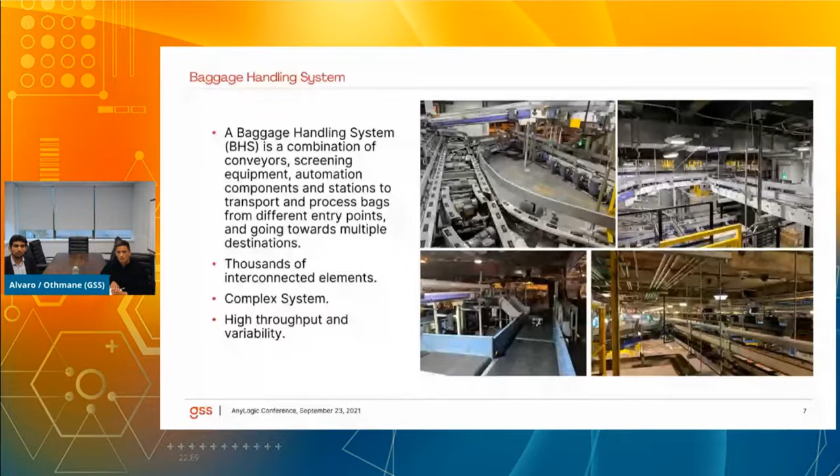Like I said in the previous slide, we modeled a BHS with more than 1,000 conveyors and with more than 100 decision points, resulting in more than 2.8 million decisions daily. So the process starts at the airline counters where the bags are dropped in a conveyor network. The bags are loaded into empty trays through a tray conveyor.

The loaded trays go through the explosive detection system, and then the bags are dropped into a conveyor network, and the empty trays are stored in a temporary parking area. The bags that are dropped here join piers and carousels, then are transported to the airlines through unit load devices.

There are three main types of decisions that a tray should take. The first one is start and stop decisions. For example, the empty tray should stop at the end of the parking area waiting for the bag, and also the bags should wait at the end of the conveyor waiting for the empty tray.

The second type of decision is point of divergence. So for example, a tray should take this segment or the other segment. Here we can see that the first bag went through the first CT machine, and the second bag went through the second CT machine.

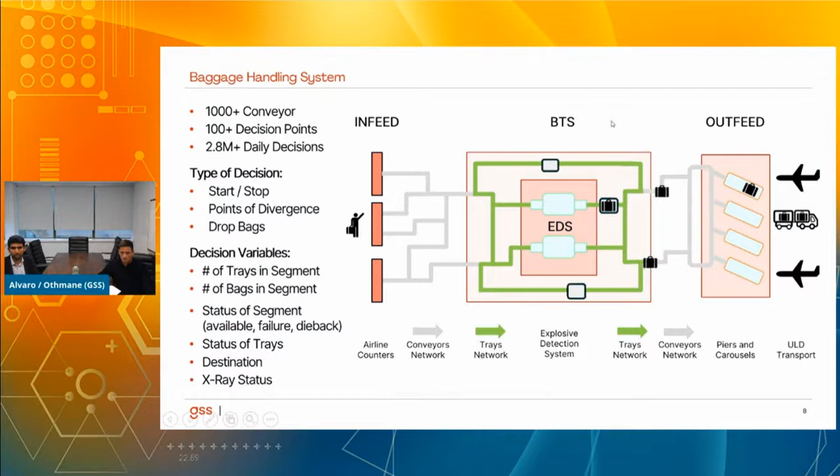Given space constraints between trays, the implementation of the bag tray system was successful from a mechanical point of view, but the flow management system presented many improvement opportunities. The main business challenges we face are that flights are delayed, so the peak time may change in the day, so the resource allocation

should be adapted. Another main business challenge is that the customer experience is affected at counters and at the transit drop-off belts if we can no longer push bags into the system. And the other one is that the practical capacity, mainly related to the screening and handling equipment, is not used at its full potential.

So there is a need for a robust and dynamic system architecture to support the implementation of a smart control automation approach. That's why we introduced a high-level control approach. And to test operational improvements and infrastructure evolution, we integrated the digital twin with the high-level control.

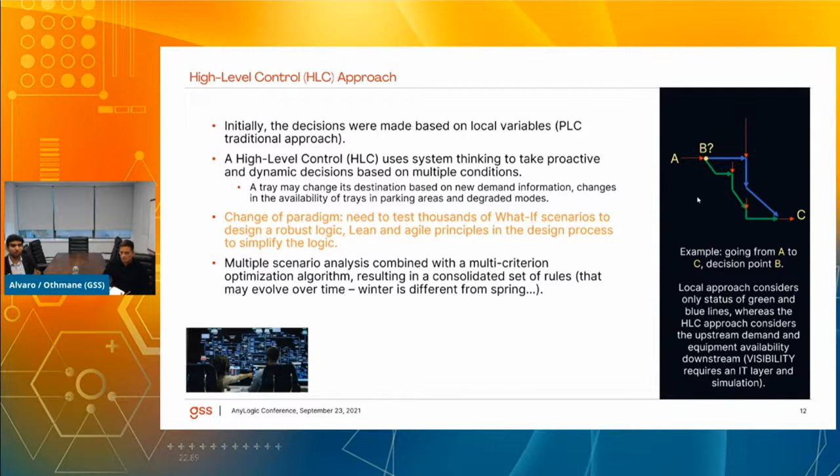For example, here we have an example of a high-level control rule. So we want to take a decision at the point P1 that corresponds to the conveyor T29-115A. So we need to choose between continuing to sector 1 or diverting to go to sector number 2. So from a human read, the logic is, for example, here.

So if we have the buffer 1 and buffer 2 below 5, so the buffer 1 is the number of trays that are accumulated in this line, and buffer 2 the number of trays that are accumulated in this line, it's below 5, then we choose to go through the sector number 1. The other condition, if we have the utilization of a component that is downstream the sector number 1, so if it's below 50%, then we go through the sector number 1.

And the third condition, if we have a ratio between buffer 1 and buffer 3 below 50%, then we'll have to go through the sector 1. Otherwise, we have to choose to go to the sector number 2. This rule is then transformed into a system rule. So in our simulator, we have the ID of the components, the condition, and the expressions that we use within the condition.

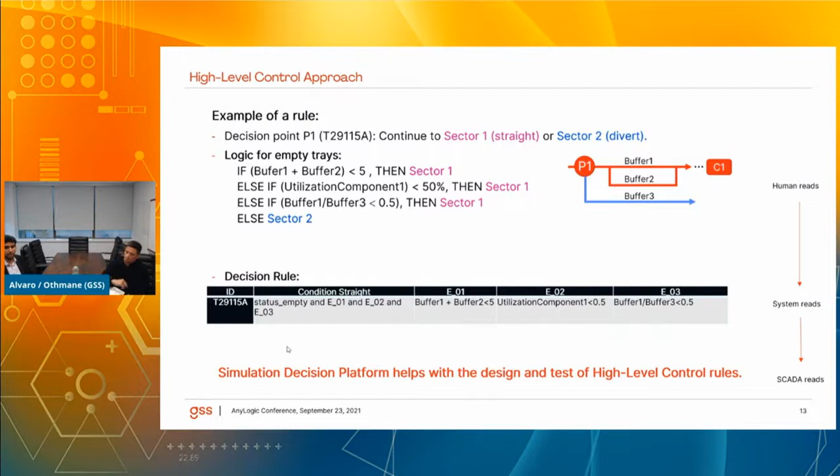Thanks, Othmane. So, as you can see, this is a very complex challenge that requires a high-level approach as well as a systemic view. We like this quote, or we bring it a lot into our projects, from Herbert Simon, which says that modeling is a principal and perhaps the primary tool for studying the behavior of large and complex systems. We know that this is a very complex system, and we know that modeling and simulation is a key and fundamental tool to explore the solution, the HLC concept in this case.

So how does our simulation model look like? First, why do we choose AnyLogic? First, we knew it was a complex system that requires a dynamic architecture and a very flexible software. And we also knew that there were, as Othmane said, millions of decisions that have to be taken during a runtime simulation. So those simulations need to be managed by an agent-based approach. So combining a flexible, robust system and an agent-based approach, we knew that AnyLogic was the proper choice for us.

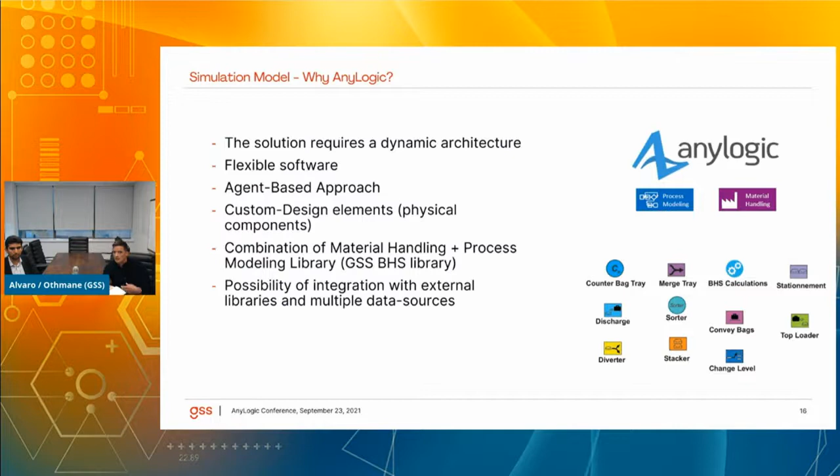But I will say that part of the most important elements are the BHS calculations. We take the human reads that Othmane described previously and convert that into vectors of Boolean variables, so it can be used and transformed into decisions during the simulation. Of course, the integration with external data sources such as TXT files, CSV, Excel, and databases was a very important element as well.

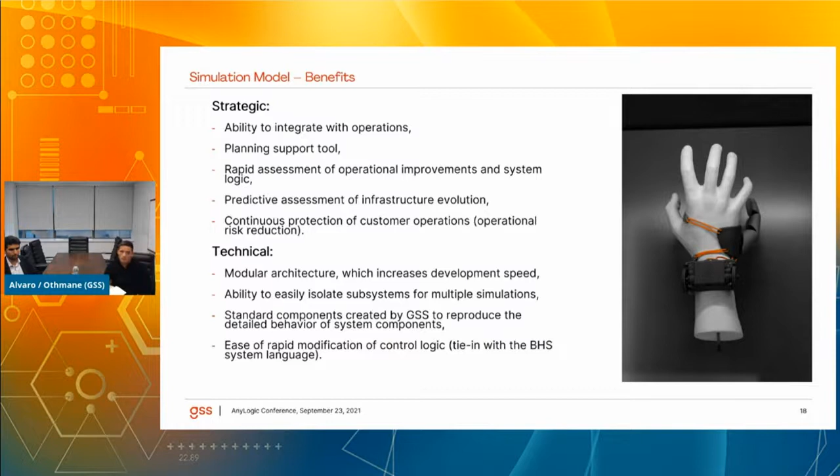So let's take a look at the model. I lost my, oh, there you go.

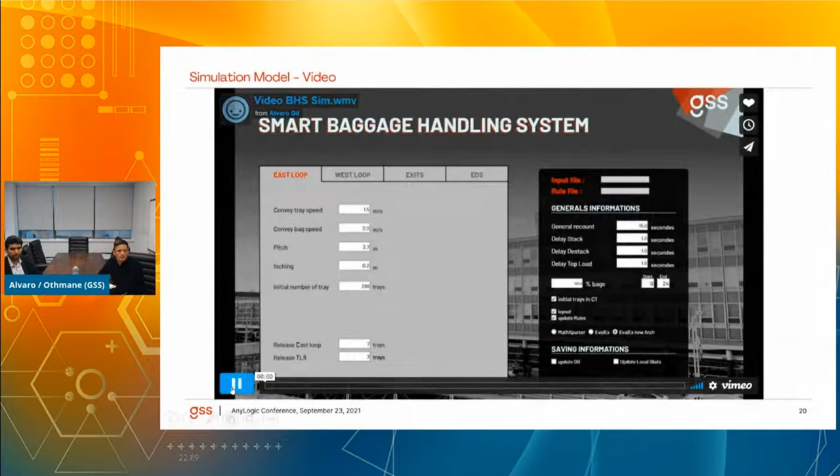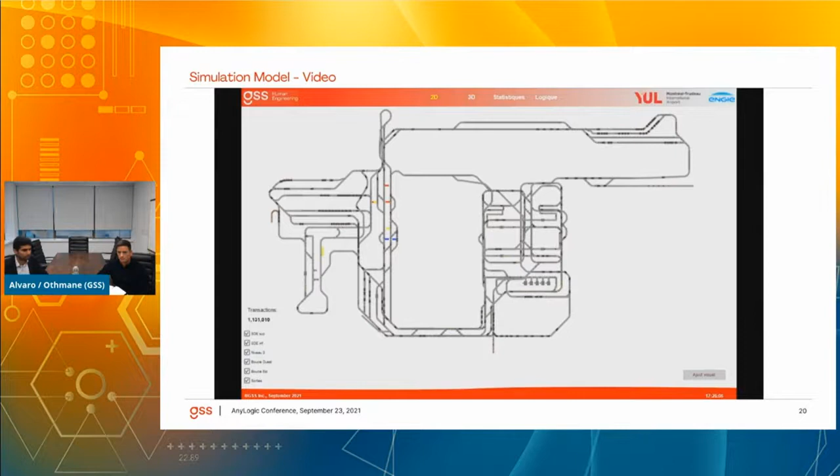So this is the main page of the simulator, where we can change the system parameters, the input files, and also the saving information. Here we can see the global view of the system. It's a closed tray system with multiple entry points. So the trays go to a centralized explosive detection system before joining the exit points. There are also multiple parking areas where we can store the empty trays where the demand is lower. Here we can see the introduction of bags into the system. So the synchronization between bags and trays to load bags on the trays.

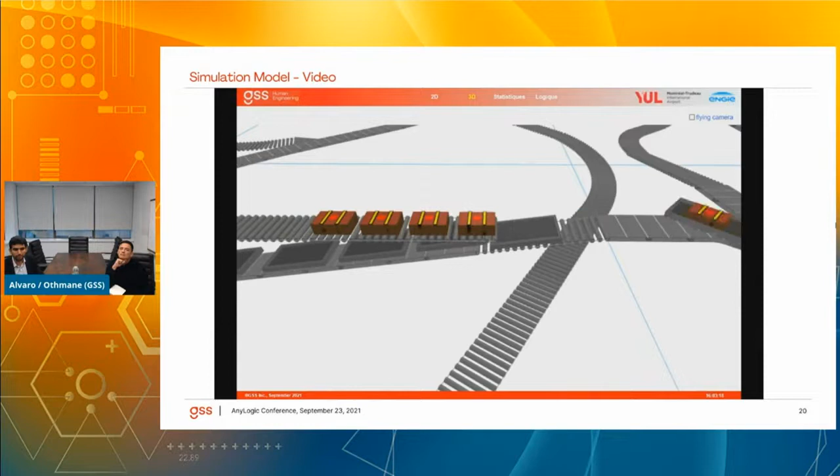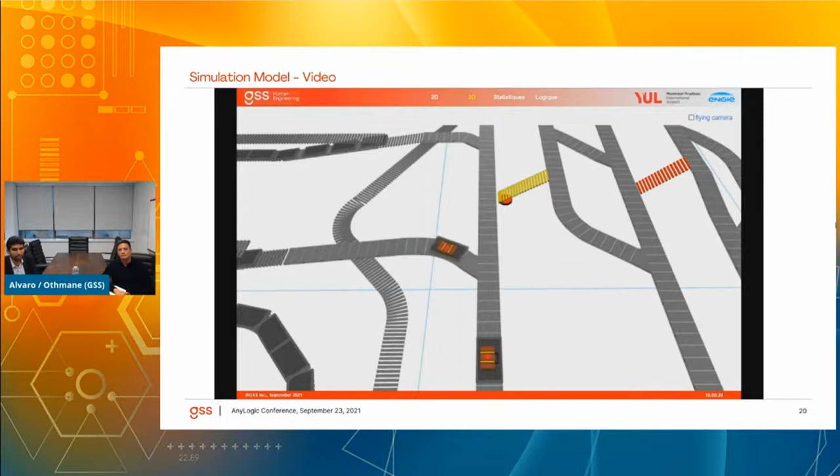Here we can see the movement of merging two lines into a main line with the respect of the distance constraints between trays, and also the priority that is set up on the simulation main page. Here we can see the movement of stacking empty trays one above the other and forming a batch of 4 columns to maximize the utilization of the parking area.

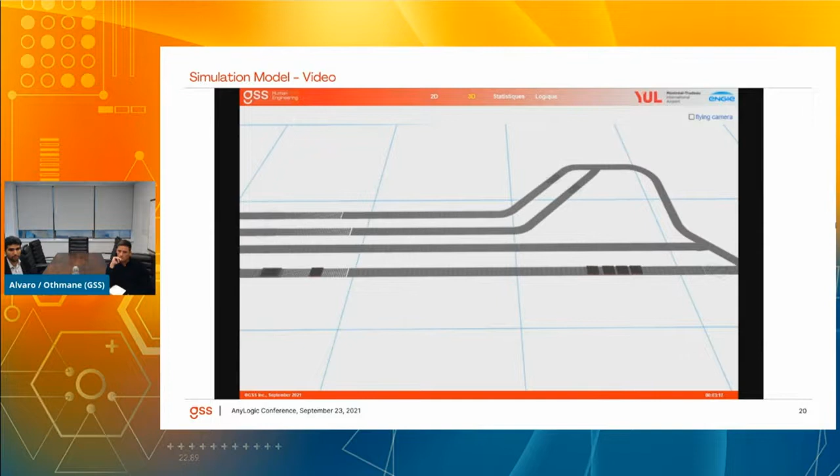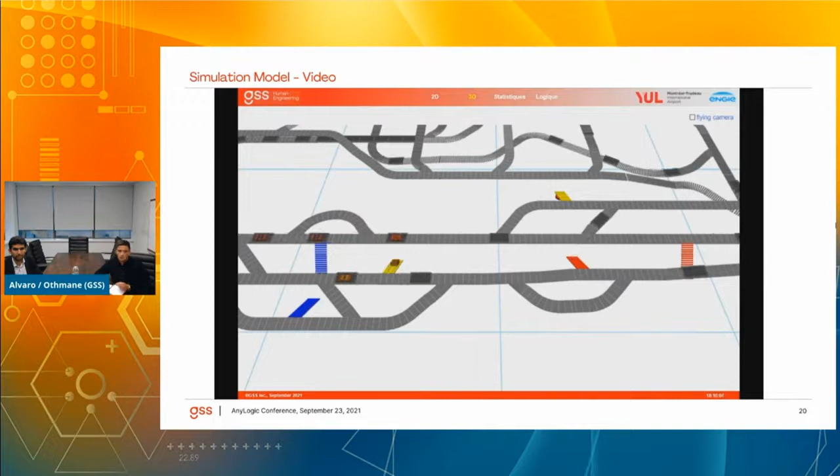As you can see, all those elements had to be manually created by us to represent the reality, as well as this, for instance, is the exit of the system. So this is the communication with the sorters. Basically, these are the discharge once a tray arrives to a decision point. This is one of the decisions that Othmane was describing at the beginning. They have to decide based on the status of the bag if they drop or not.

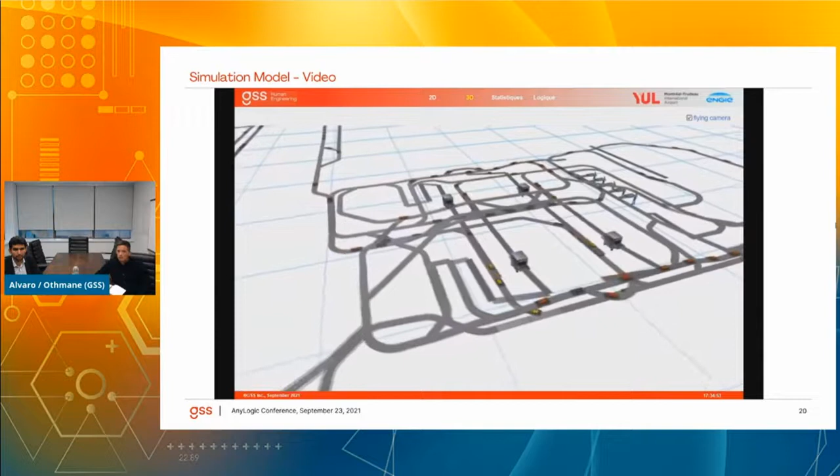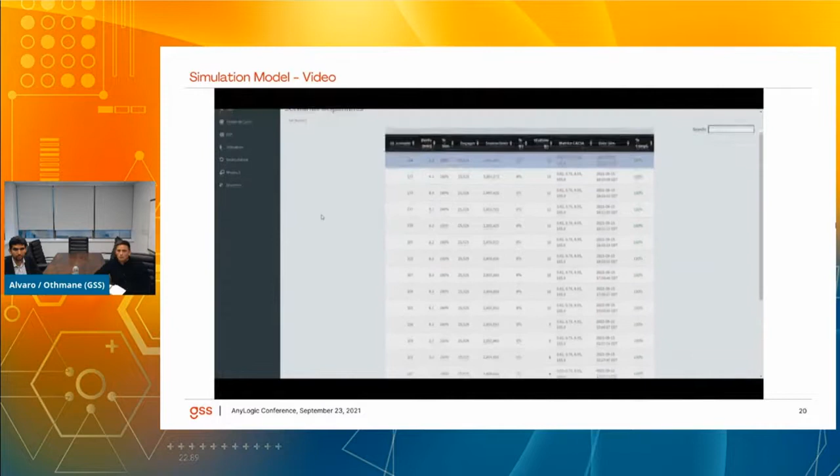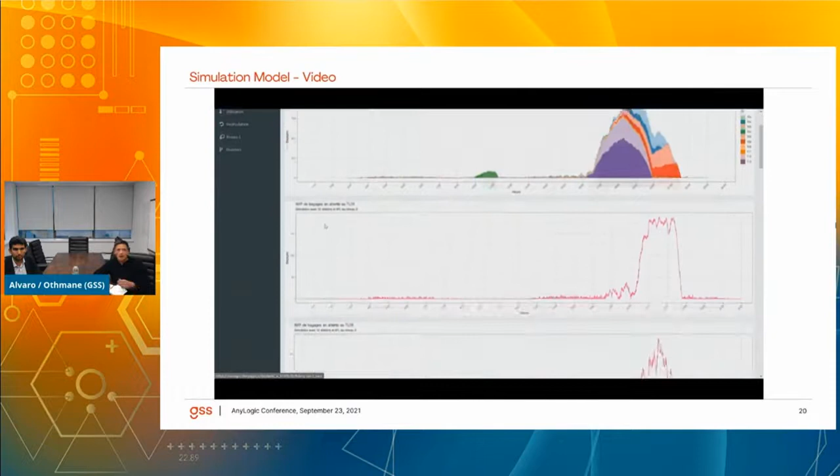This is just a general 3D overview of different components working. As you can see, there are several levels. So sometimes from the 2D, it looks like a single line, but we have different lines interacting above and below. Once the results are available, once the simulation is done, we have this web interface where we access internally to analyze the results, compare all the scenarios, and we'll calibrate the model and send information back to the customer. This is in general terms how the simulation looked like.

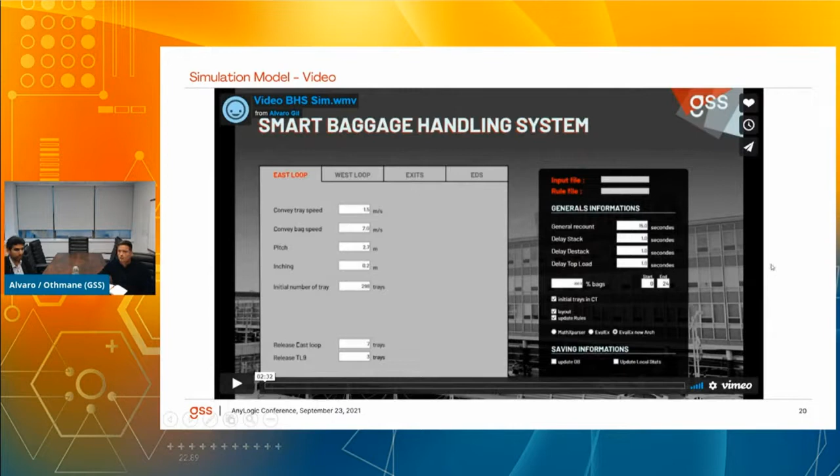In terms of results, we know that thanks to this development and this long-term collaboration with all the stakeholders, we were able to reach the target practical capacity that we established at the beginning of the project. We know that the airport is ready to handle the recovery phase, and we were able to prove the high-level control strategy, as well as developing a stable and mature simulation platform for the airport. We know that we have a rapid decision-making supporting tool for operations and planning.

And we are able to easily identify bottlenecks, issues, as well as support the infrastructure growth decision. It's a very good tool for contingency plan, and it has demonstrated efficiency gains. So now in the pipeline, we have to finish this digital twin, which is the next phase.